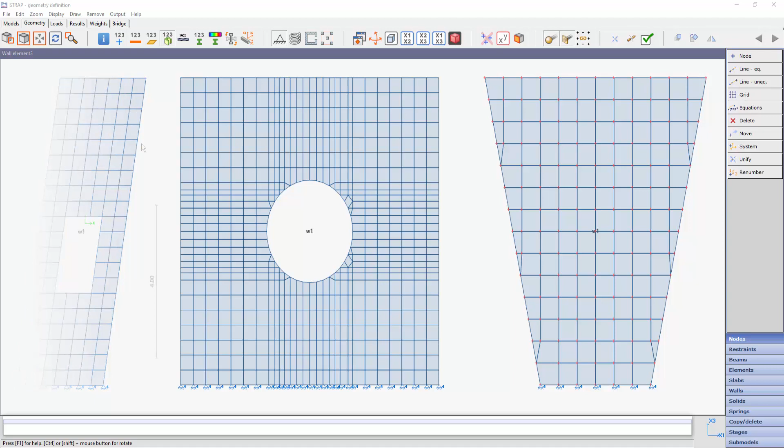Let's see an example. On the right side of the screen, we can see a surface of shell elements, and the width varies along the height axis.

Under walls, a new option for element wall is available. This option will allow us to define a wall based on a surface of predefined shell elements.

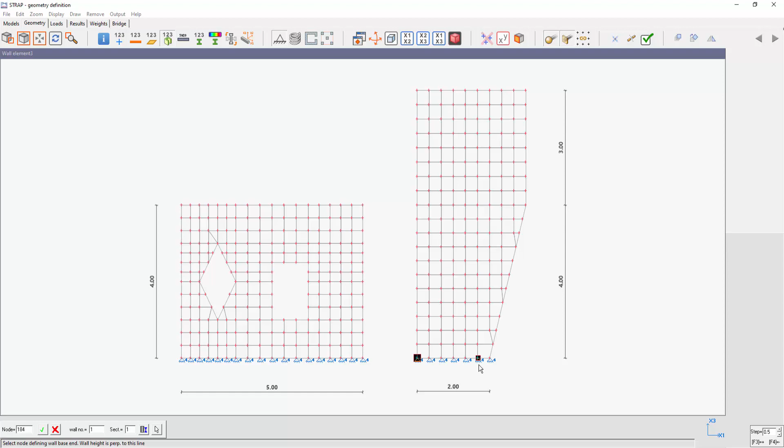Once we click Elements Wall, we must define the wall's contour. The selection of the first two nodes will define the wall's baseline, and two more nodes to enclose the wall contour.

At the end of the definition, we can see that the wall is filled with a gray surface, and we can see the wall number, W1.

For this example, we'll define another wall on top of W1 to cover the entire shell element's surface.

On the left side, we can see a shell element surface with a rectangular opening and another irregular opening. We'll define this surface as a wall as well.

The definition of elements as walls doesn't affect the stiffness of our model. This will only affect the results display and will give us the option to design these surfaces as walls in the reinforced concrete design module.

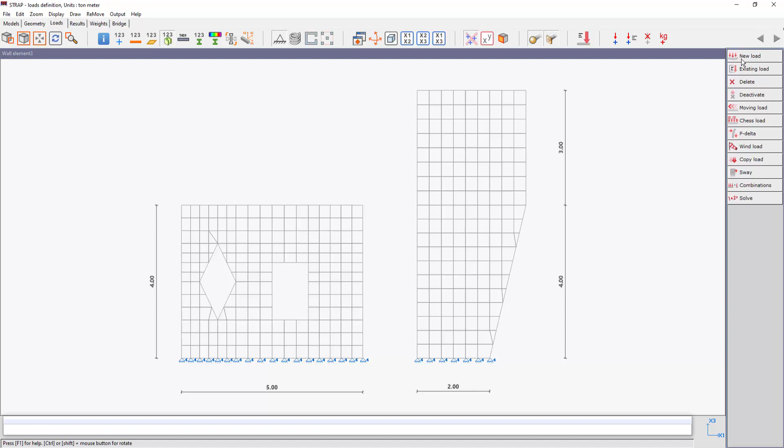In the loads module, we'll define 10 tons of joint load in the X1 direction at the top level of the walls. Loads can be applied perpendicular to the wall or in plane at any desirable point.

In the Results module, under Wall Results, we can see the option for the result type: moments, shear force, axial force, etc.

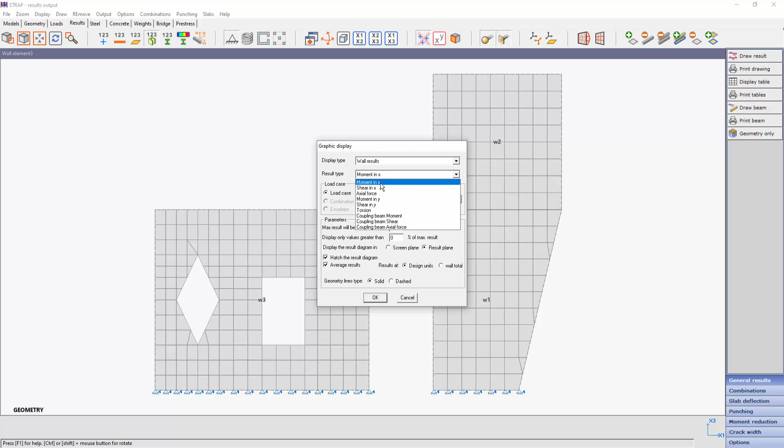Let's see the moments in the wall's plane, moment in the X direction. We can see on the left 40 ton-meters, which is the 10 tons horizontal load multiplied by 4 meters, the wall height measurement. The same can be seen on the wall on the right.

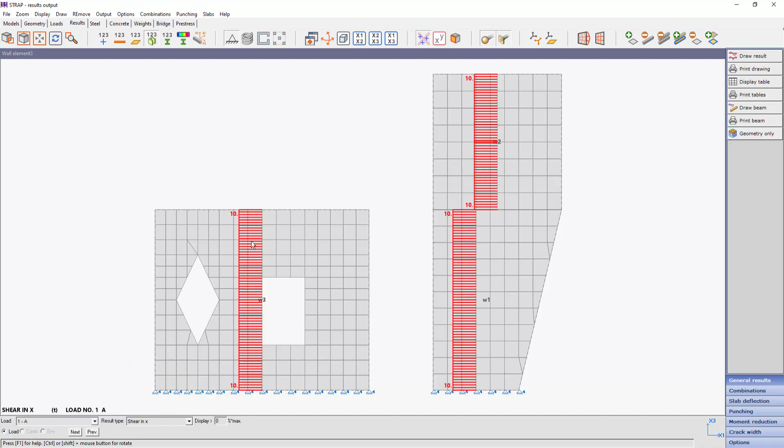Let's see the shear force in the X direction. We can see the 10 tons that was defined at the wall's top level.

We'll move on to the concrete module for wall design. Under walls, clicking Compute will calculate the walls, as we can see in the wall results summary table. Detailed results can be displayed as well.

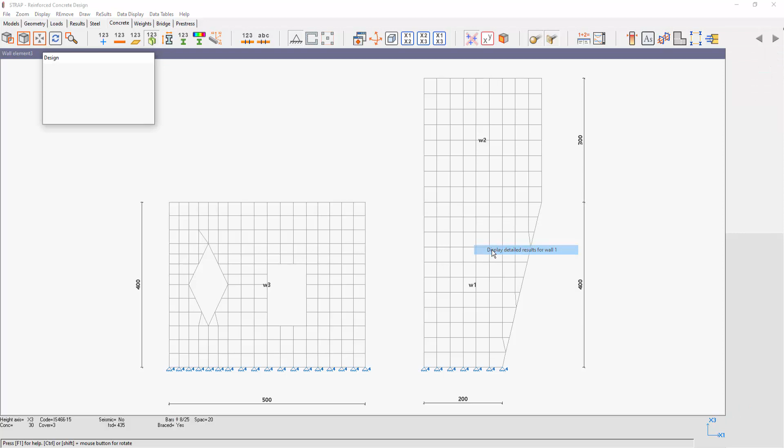At the top, we can see a side view of the wall and its thickness. Below that, we can see the calculated reinforcement.

In cases where the wall section varies in length, the shortest section is taken into account for design. In this example for W1, the shortest section length is at the base of the wall and equals 2 meters.

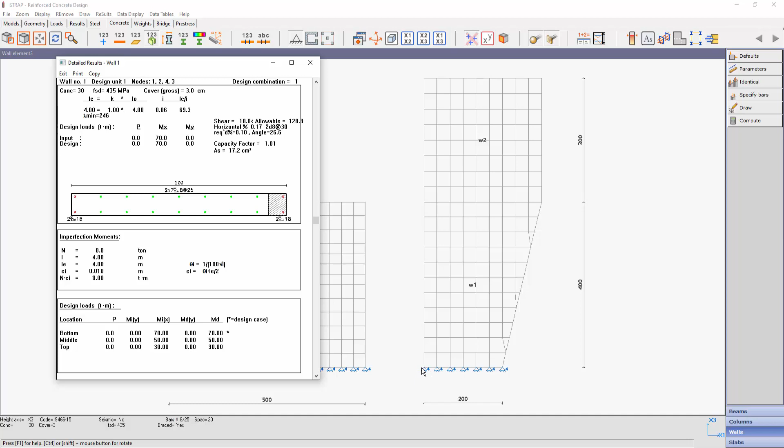For the design loads, the program applies the design loads from the wall top level, bottom level, and at the wall middle. For the example on the left, the program will assume that the wall section is the section between the openings.

In the detailed results, this can be seen clearly.

If the user wishes to get a more conservative design, the wall can be split into several walls instead of one wall unit.

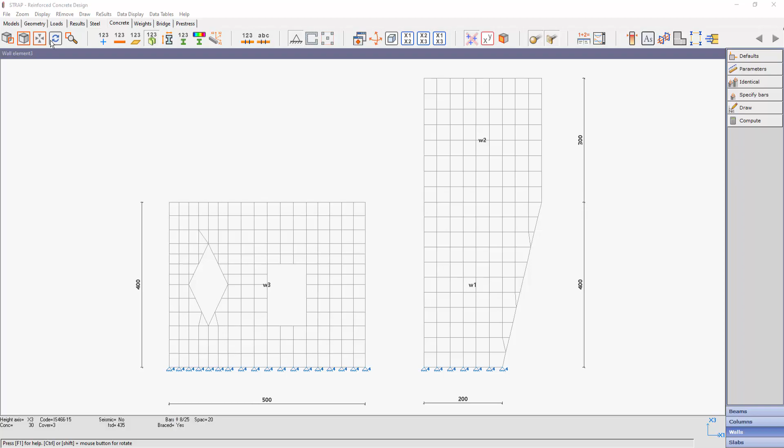Let's go back to the geometry module and split W3. Under Walls, click Revise. Revise allows us to revise the wall contour or to split the wall.

Split is available along the height axis or the baseline. We'll select Split Wall, select W3, and now we can select nodes along the baseline or the height line. We'll split at the opening's start and end points.

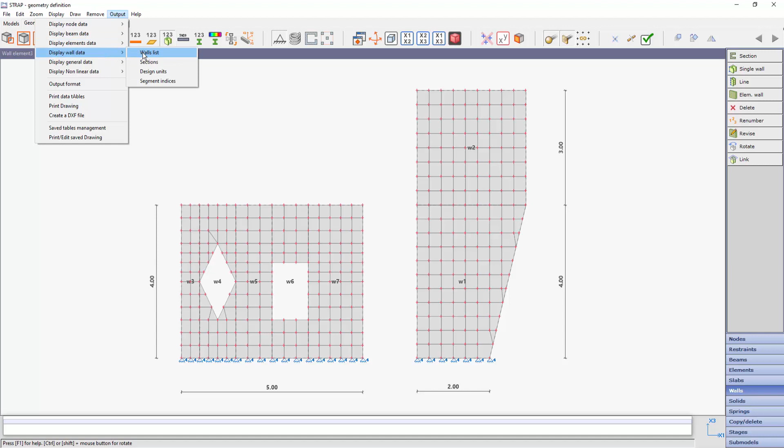Under Output, Display Wall Data, Walls List, we can see information about the defined walls. For example, W1 is defined with node numbers 1, 2, 3, and 4. Its area is 10 square meters, the height is 4 meters, and the volume 2 cubic meters.

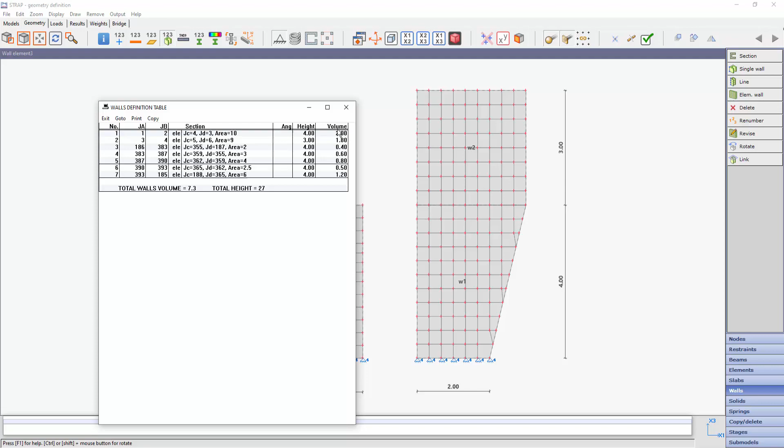Another major improvement is related to steel design. A detailed calculation report is available for the design according to the European standard EC3, the American standard AISC, the Brazilian standard NBR 8800, and the Israeli SI 1225 for hot-rolled or welded steel. Also available is the European EC3 and the American AISI for cold-formed steel.

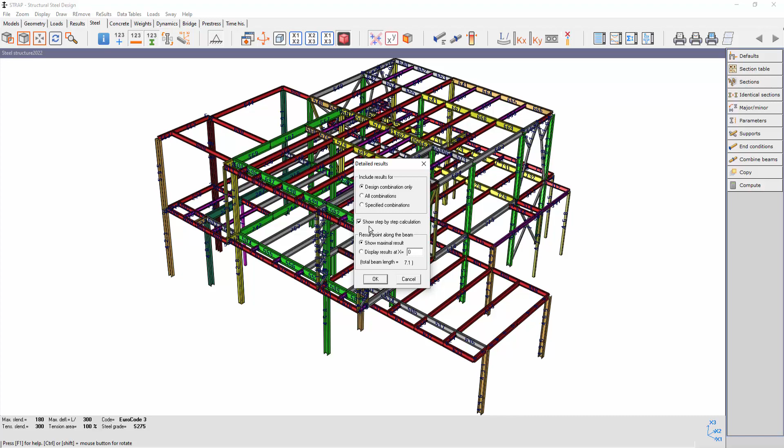Let's see an example of the detailed results for a hot-rolled section based on the European EC3. When asking for detailed results, checking Show Step-by-Step Calculations will reveal the detailed calculation. Under the Detailed Results table, we can see the addition of detailed calculations, formula numbers, and parameters for each code check.

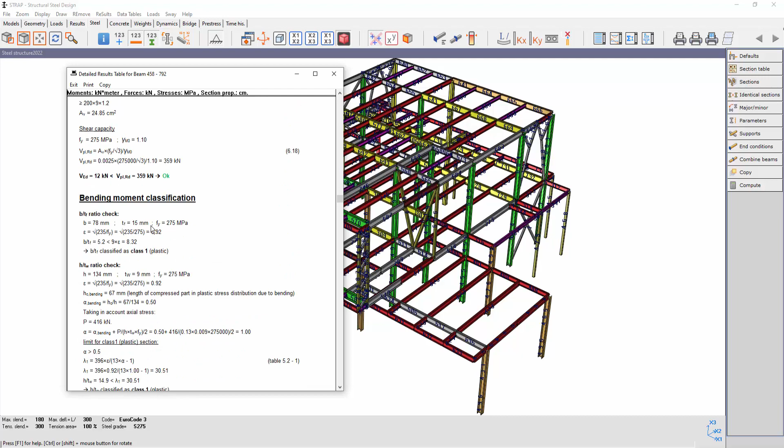Let's move on to the improvements in the geometry module. Under Display, an option to display the model's center of gravity on the screen is added. Clicking this option will display the origin of the model's center of gravity.

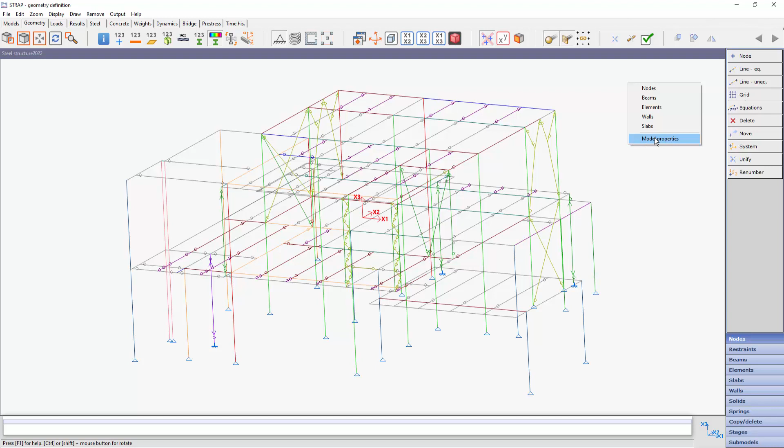To display the center of gravity coordinates value, right-click on a blank spot on the screen, then Model Properties, and we can see the center of gravity coordinates value.

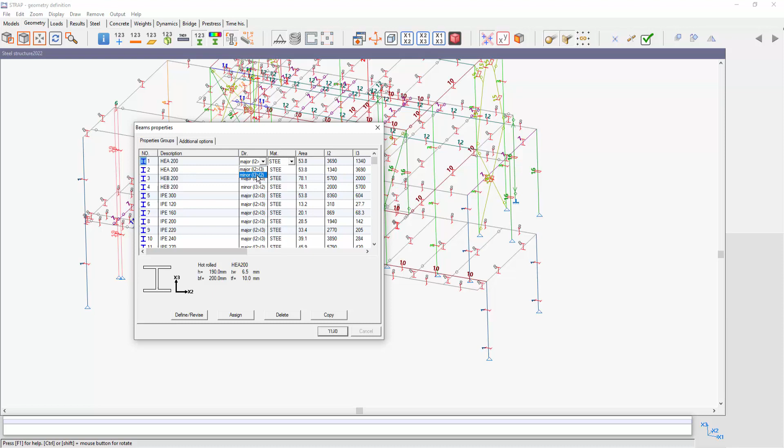In the Properties table, there is an option to revise the section direction and material via a drop-down menu. For example, we can see the orientation of property number 1. Revising the direction from major to minor, and now we can see that all the beams with property number 1 are revised.

Another new feature is the ability to zoom on nodes or elements that were notified during a geometry check or errors during the solution. Let's see an example.

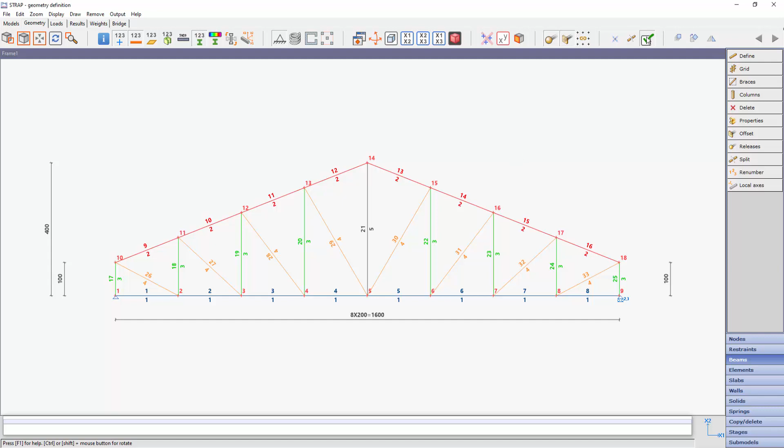Clicking Check Geometry, we can see that the program found that beam number 21 has been assigned an undefined property.

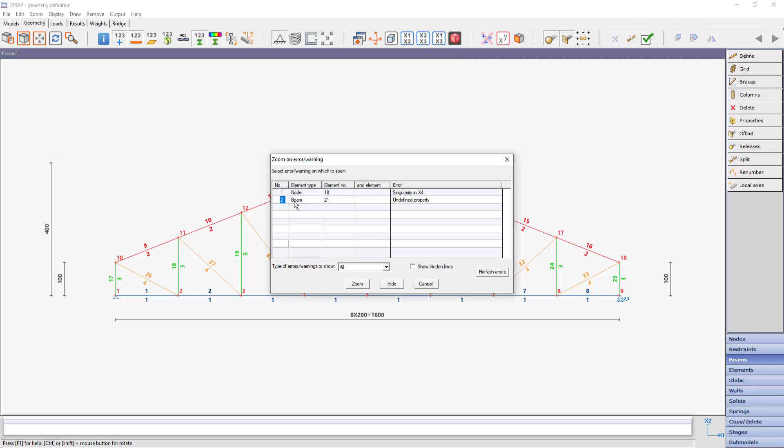In the option Zoom, Move Window Center, there's an option for Zoom on Error. We can see a table with errors after geometry check, for example error number 2, and errors of singularity, error number 1, that was obtained during a prior solution. We'll select line 2, click Zoom, and we can see beam number 21 with property number 5 assigned to it.

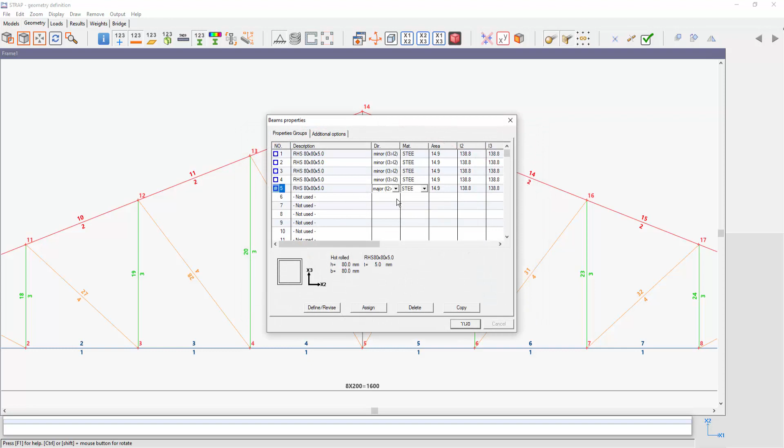Going into the beam's properties table, we can see that property 5 is undefined. We'll define property 5 and go back to Move Window Center, Zoom on Error.

Since we know this error is now resolved, we can hide it. In case we want to see the hidden lines, we can check Show Hidden Lines.

Errors during geometry check will be refreshed and deleted from this table after being resolved. Errors received during the solution will only be deleted after another solution, assuming that the problem is resolved.

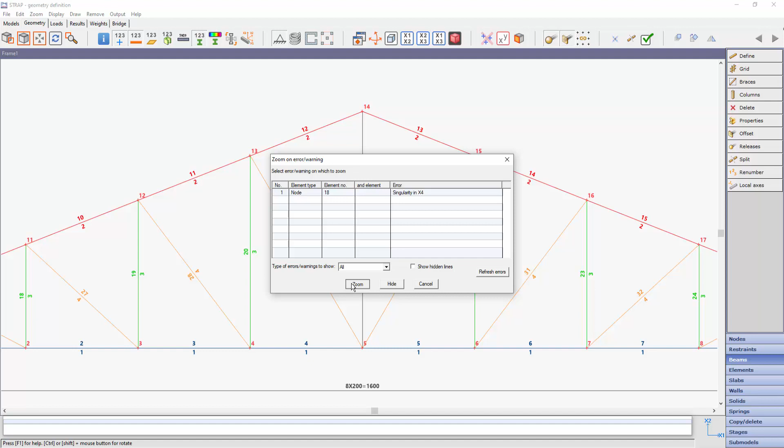Let's zoom on error number 1, singularity. We can see the reason for this error is that the degree of freedom x4, which is rotation around the x1 axis, is unrestrained. To resolve this, we'll define a restraint for rotation around the x1 axis.

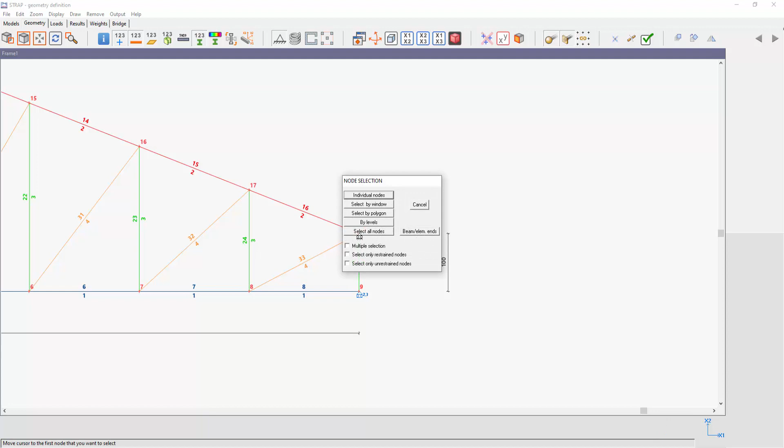We'll solve the model and go back to the geometry and ask to zoom on error. We can see that no errors were found.

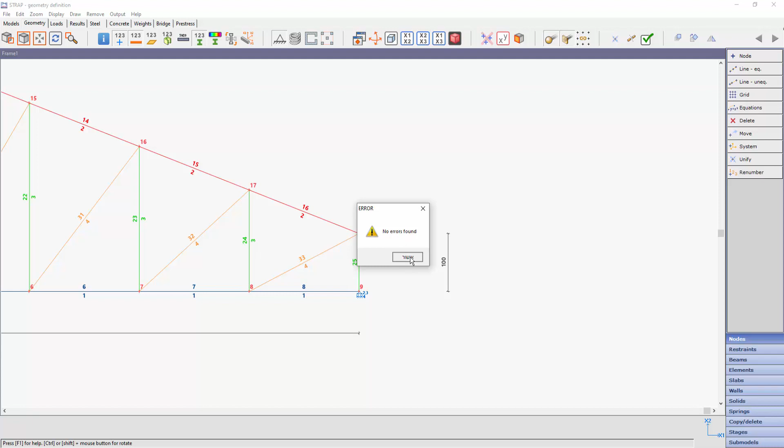Let's move on to the loads module. When defining a new load, the load can be assigned to a group. Under Assign to Group, all predefined groups are available.

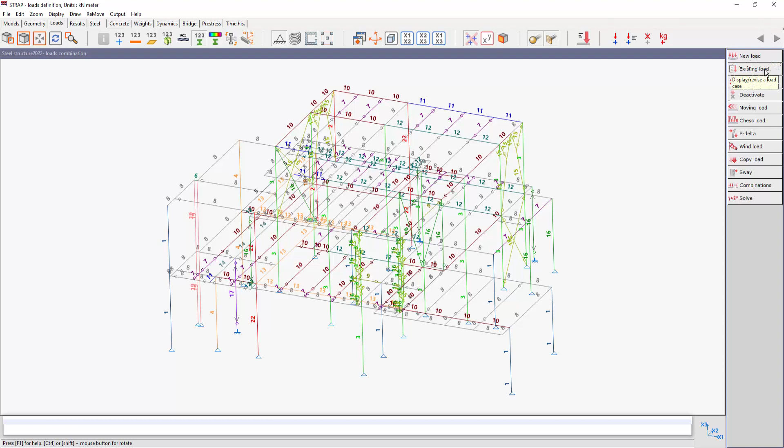This option will allow us to create load case combinations automatically based on the predefined combinations in the library of combinations or by a selected code. In this example, we can see 8 load cases that are assigned to groups. During combination definition, the button By Code is added.

We can see all 3 load groups in the combination table. Clicking By Code will allow us to select the design code, and all combinations and factors of the selected code will be assigned to the load groups automatically.

For this example, we'll select the Israeli steel design code IS1225. We can see that 5 load combinations are created with the load factors for each load group. Now we'll display all the combinations that were created based on the code and the load group's type.

While defining combinations, another option is by library. The difference between by code or library is that by code the program creates all combinations, while in the library the user may select only a part of the required combinations.

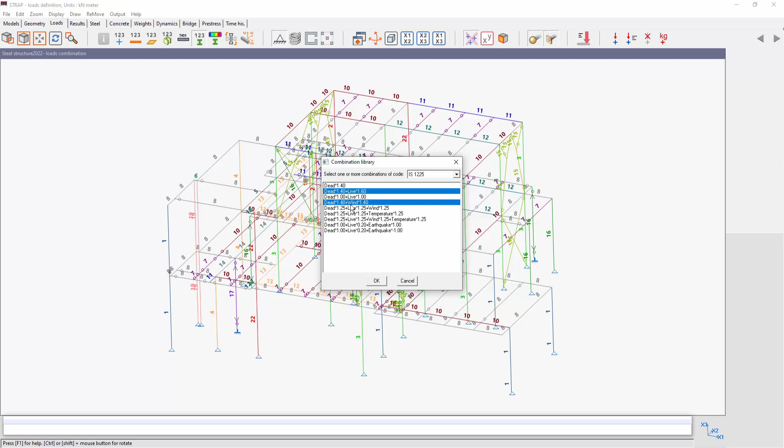Clicking library will show all the available combinations of a selected code. By using the Control key, we'll select 3 combinations from the list, and we can see that all 3 were added to the combinations table. This option is also available when defining combinations in the Results module.

Let's see another example for a concrete structure. In this example, we have 4 load cases that are assigned to 2 groups, Dead and Live. We'll define the combinations in the Results module.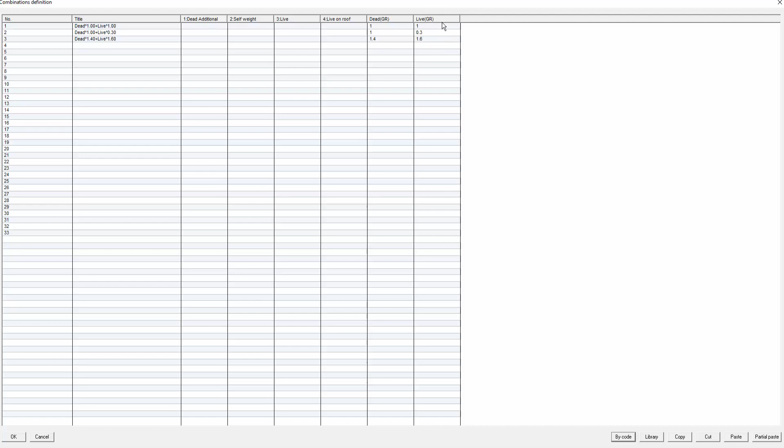If we look into the combinations list, we can see 6 combinations, and loads 3 and 4 that are assigned to the live group are alternate.

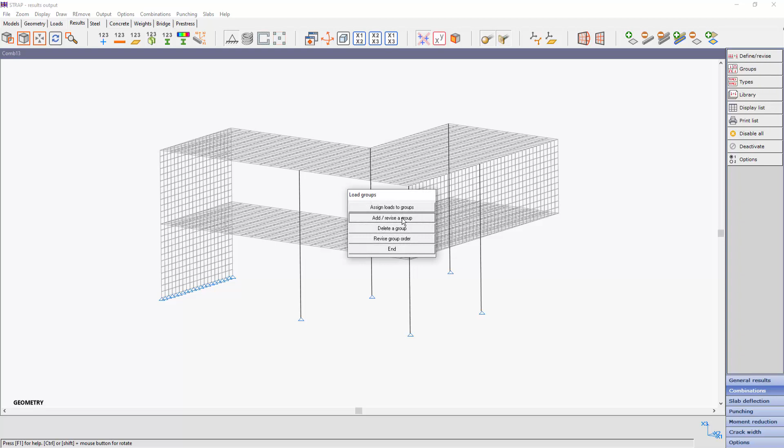This definition is related to the group type and can be revised under Combinations, Group, Add Revise. Select the live group. We can see the load cases that are assigned to it.

Under Combination Generation method, instead of a different combination for each load in the group, we'll select one combination that includes all loads in the group.

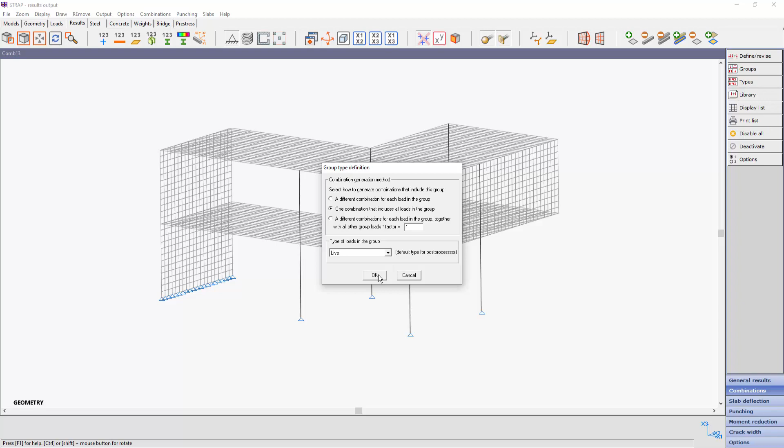Now when we display the combinations list, we can see only 3 combinations, and the loads in the live group are summed together.

For global load definition, under Load Type, rectangular area is added. This option allows defining an area load by selecting 2 nodes or 2 coordinates.

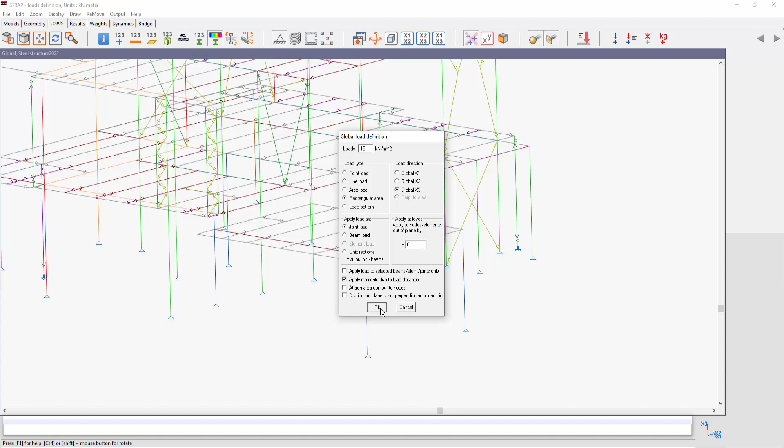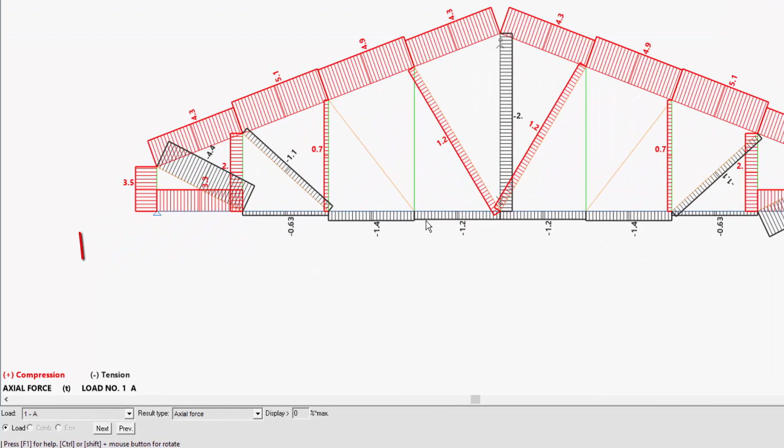Let's move on to the Results module. When displaying axial force for beam elements, compression is colored red and tension is colored in black, and the program displays the signs for compression and tension.

For displacement results, the maximum displacement is written at the bottom left of the screen.

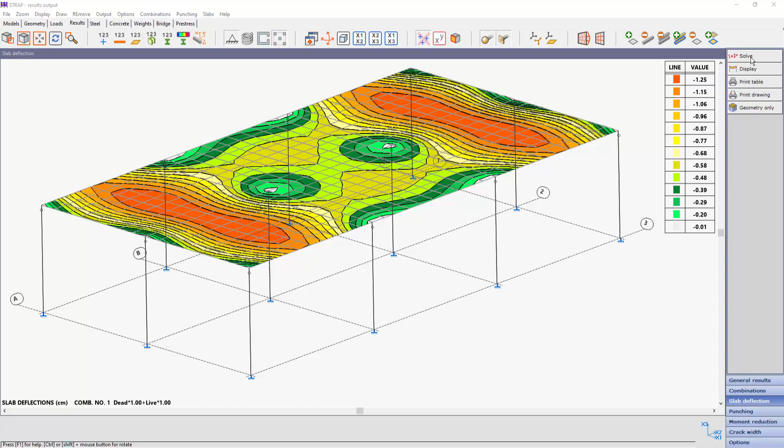For reinforced concrete slab deflection calculation, the following options are added. Under minimum reinforcement, the user can now specify a minimum reinforcement diameter and spacing. When selecting minimum for slab or slab walls and specifying the diameter and spacing, STRAP will calculate the required minimum reinforcement. For the slab deflection calculation, it will consider the maximum between the calculated and the specified.

Under User-Defined Reinforcement, a Defined Element Reinforcement button is added. This button allows specifying top and bottom reinforcement in both directions. After the definition, the user will be asked to assign the definition to selected elements.

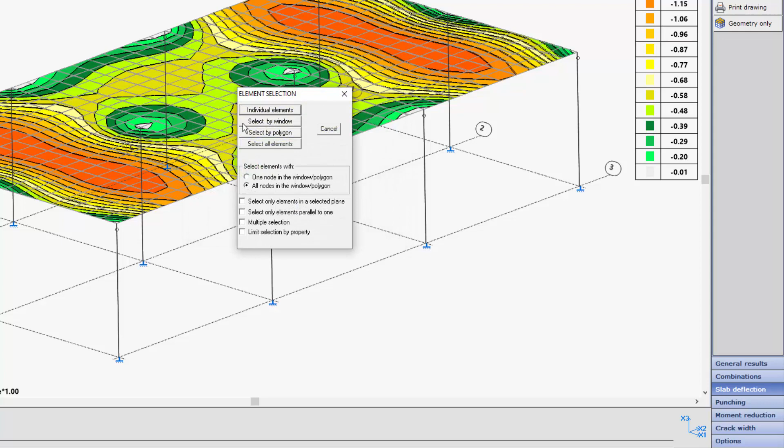Another new option is to deactivate certain combinations for reinforcement calculations.

Let's move on to the Steel Design module. For combined beams, the program displays error markers at the beginning and at the end of the combined beam.

Under Draw, a Support Display Parameter option is added. This option allows control for the display of supports and combined beams. For example, we'll uncheck the combined beams, and the symbol doesn't appear on the screen.

This option applies for supports as well. For example, buckling around the minor axis.

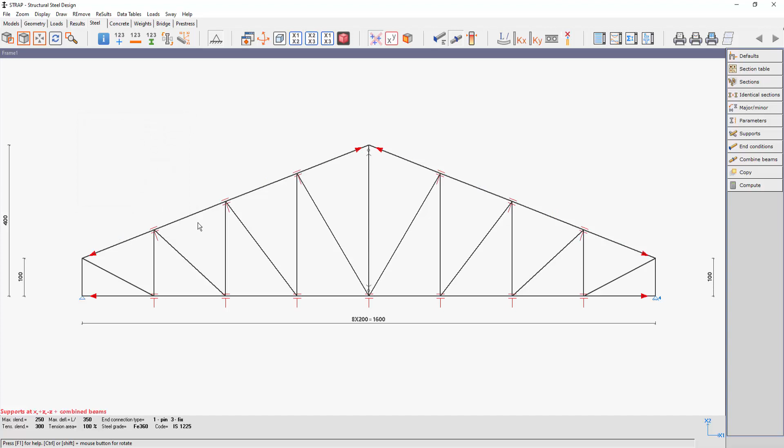In Steel Design Setup, a new button, User Steel Type, is added. This option allows the user to define user-defined steel types.

Let's see an example. Click Add Type, we'll give it a name, insert the yield strength and the ultimate strength. The yield strength can be reduced based on the thickness.

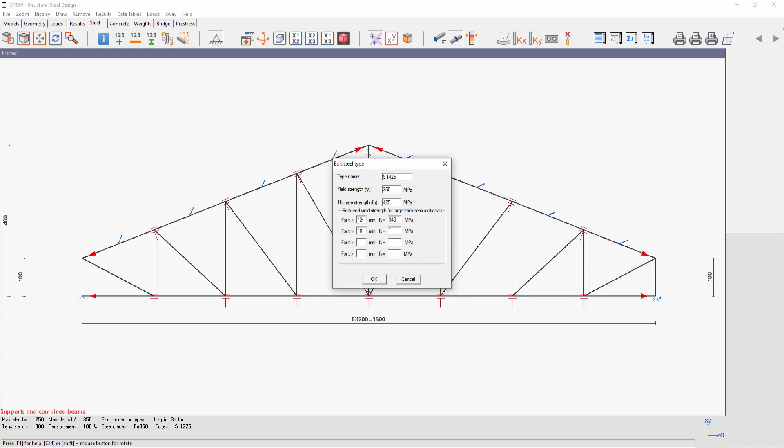For example, for steel thickness larger than 12 millimeters, the yield strength would be 340 megapascal instead of 350 megapascal, and so on. The defined steel types will be available for the current model and are saved for future models as well.

Under Defaults Steel Grade, we can see the user-defined steel type added. Thank you very much for watching.